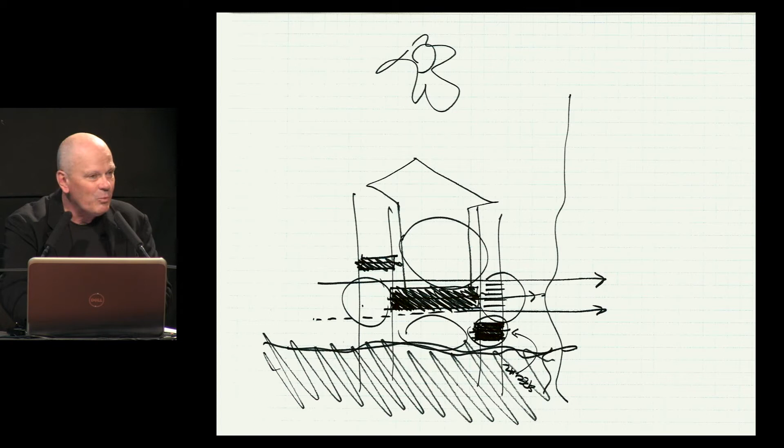Thinking about the places between, like in music, the places between the notes are as important as the notes themselves. That's why the great blues artists can make one-bar blues and be wonderful, right? Because of the management of the space between.

Simple question of making microclimates. Learning from the vernacular, here are the 3 little pigs making courtyards. So you extend the summer, the fall, and the spring.

We'd like to make architecture that is invisible. Someone asked me one time after a lecture in San Francisco, what would you like to do in the future that you're not doing now? I said, from a lifestyle point of view, nothing. But from an architecture point of view, I'd like to make buildings that are more invisible but have more to say.

Always modesty of learning from the elders. This is a building that fell down. We made another one across the street 15 years later as a tribute. Sometimes we come very close to those vernacular precedents.

The partie, of course, a French word, very important word to us. We beat it into the heads of our students. They don't like it. We tell our students that if you can't draw this 3D upside down across the table looking in the eyes of another person, you're never going to drive the bus. You're never going to be the author.

So this is the first sketch for a house that I'll show you now. All of these partie sketches start as a study of what exists already, and then they become progressively a proposition of what might be. So that house is that house, an extruded fish shack, which makes a big deal of the place between itself and the land. Seems like a boat.

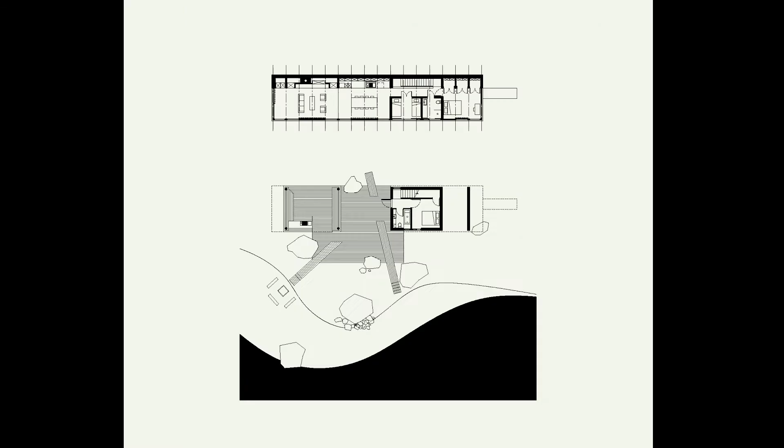So under is an important idea. This was under for Grandpa, who couldn't climb the stairs anymore, so he could watch his kids playing out of the sun. We do have sun in Canada. You come up into this temple, if you like.

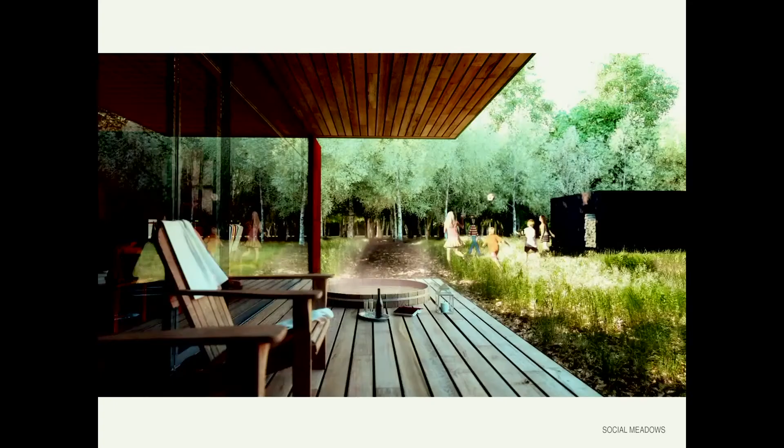Project in Ontario, making a community, an intentional community. And this is a place where the deer are the architects. So you notice, you learn that the deer make the grazing line at 2 meters, and this creates the architecture of the whole landscape. So our job was really just to reinforce the grazing line.

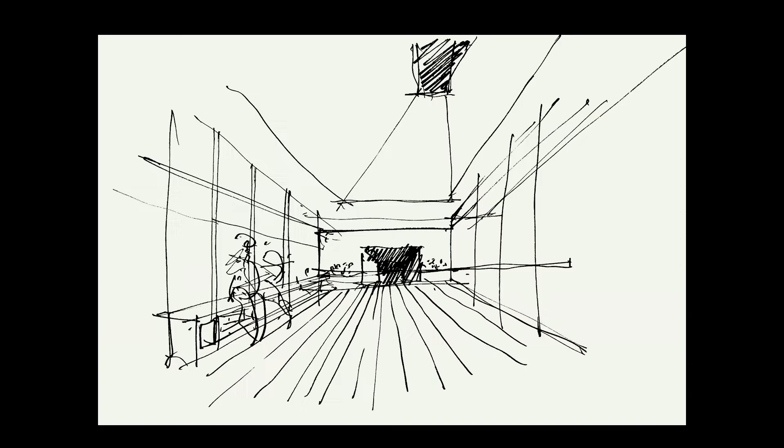One of Talbot's sketches, rendering. I don't use computer, but others do.

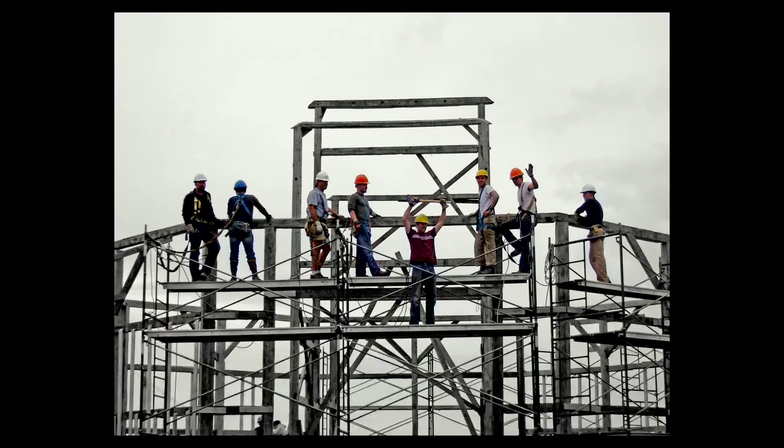Community gable building, the happy students, ghost students. We made this project in 1 week. It was a 19th century barn, moved, rebuilt in a week, and now it's a place for community events.

An author said to me the other day, what is the function of this building? I said, there is no function. So it will be very useful. Used for everything, road hockey, weddings, movie night.

So these buildings have found their way to our farm, like this early 19th century schoolhouse from my village, where I grew up. Again, this idea of minimum.

One idea that we reject is this idea of tradition versus modernity. Octavio Paz, the great Mexican poet, said, taken alone, tradition stagnates and modernity vaporizes. Taken together, modernity breathes life into tradition, and tradition responds by providing depth and gravity. So this is our idea about this false dichotomy.

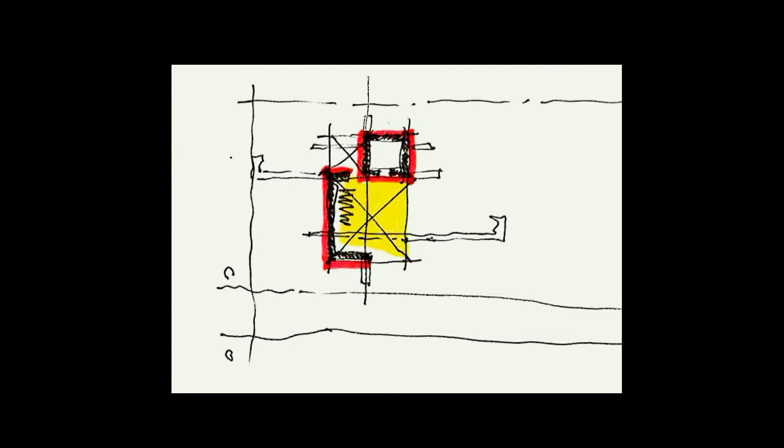So we put the 1830 building next to the building from last year, a Corten building called Enough House. So this is like this one, a kind of iconic, pure form on fins above the landscape. The partie, again, how much is enough? It's 65 meters square and sleeps 7.

Aggregated, when you take 2 buildings and make 2 courtyards, it's like 1 and 1 equals 3. It's the first sketch for that one, the partie of that, right?

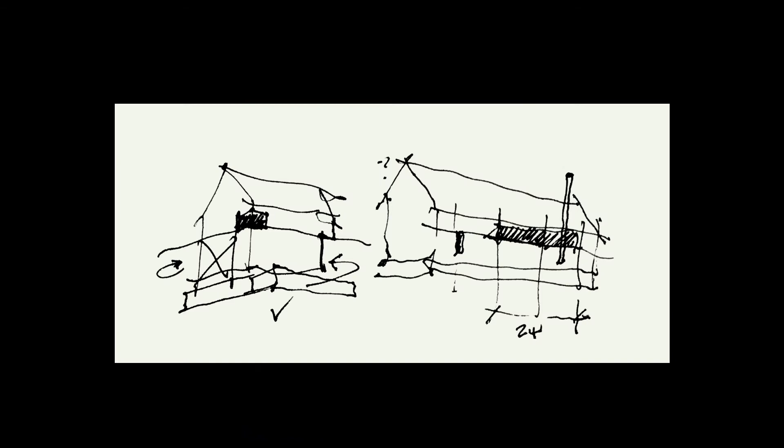My native friend wrote this essay about our work, called The Wind and the Moon. So this building is all about the wind and the moon. The moon, of course, it's called the tide house. Four times a day you see the tide coming around, wrapping around this house. It's lifted above the ground on fins so that if the tide comes in, the house doesn't wash away. The tide goes under the house.

So this is the wind truss, of course.

Aggregation, I wish I could say we did this. No, this is a vernacular building. Of course, that's why it's so beautiful in Norway.

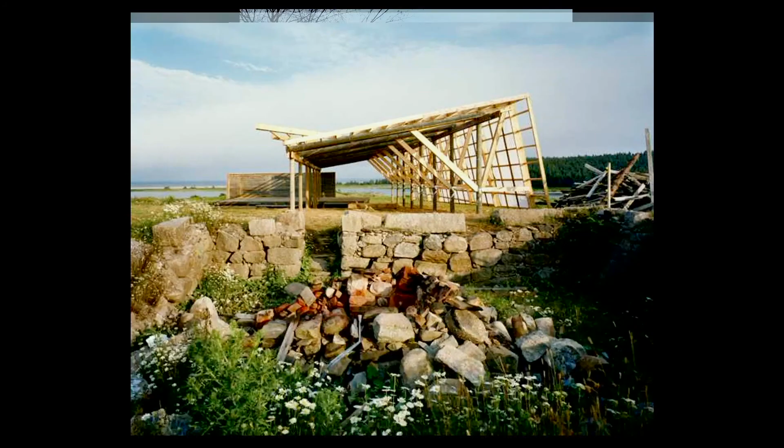But we're making a community now in Utah at 9,000 feet, 3,000 meters, based on making community, making courtyards. They have 20 meters of snow every year, so it has to be accessed from the top, like Santa Claus.

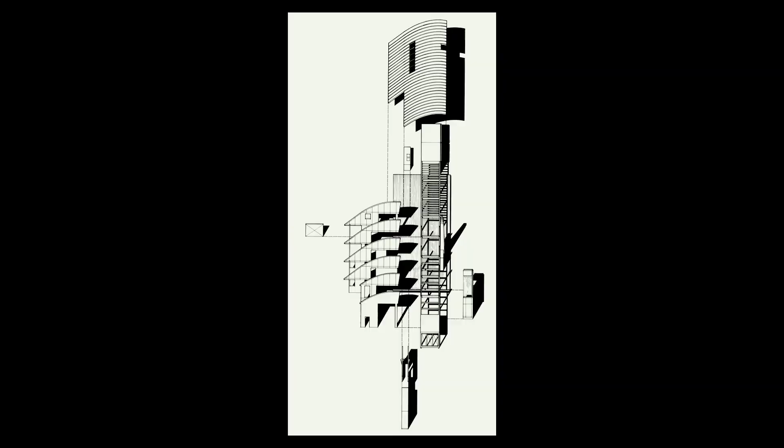Some lean-to houses, always about the landscape first. This house was built in 2 weeks for 100,000 Canadian dollars.

The party again. This is the clients and me the first day on the site together. It's about this idea, this primordial idea about prospect and refuge, the need for both prospect and refuge. Taught to me by a woman who was a client who was sexually abused as a child, so she knew all about that.

So this begets that. Pavilion on top of a rock, the ocean horizon, of course, passive solar, we shouldn't have to say it.

A community one like that, a library at University of Toronto, usually one material, and it usually has to be a material that can last for 400 years. So this is a copper library produced.

This is the sketch at the interview. This is the sketching together with the users to design the project. This is the point in the participatory design process when I was telling the users that they all had the same idea, and they believed me.

Social spaces. What comes with the public architecture is a kind of building systems approach, or approach to architecture that's about the trades, the building trades.

Now, Talbot, I'd like you to come up and talk about this next project, which is a real test for a critical regionalist approach. Thanks, Brian.

I guess to reiterate many of the themes that Brian was talking about, we were given a project to design a Canadian embassy in Bangladesh. And to us, that was kind of the ultimate test. We were doing a lot of work in our local region, so I guess the question was, how do we respond? What's our toolkit like when we go abroad? We couldn't imagine any place further from Nova Scotia, Canada, than Bangladesh.

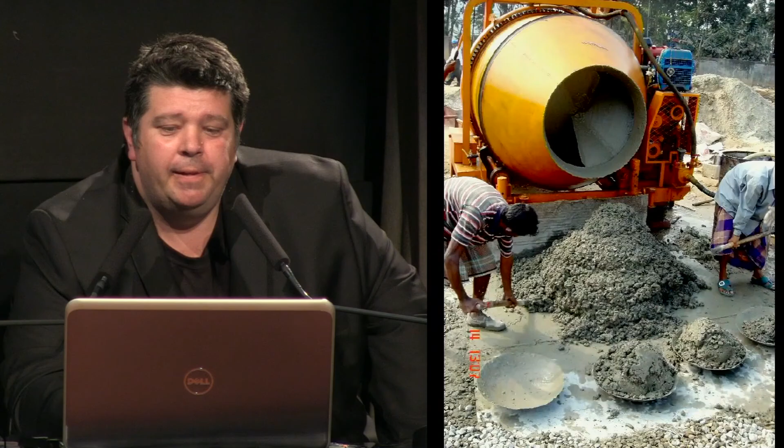How they use concrete: they pour it by hand with small tools and actually carry it on their head. It's an amazing thing to watch them pour a building. It's pretty orchestrated. So understanding the labor, the people, the construction was very important to us to start developing ways of thinking about a building that represents Canada in that culture of Bangladesh.

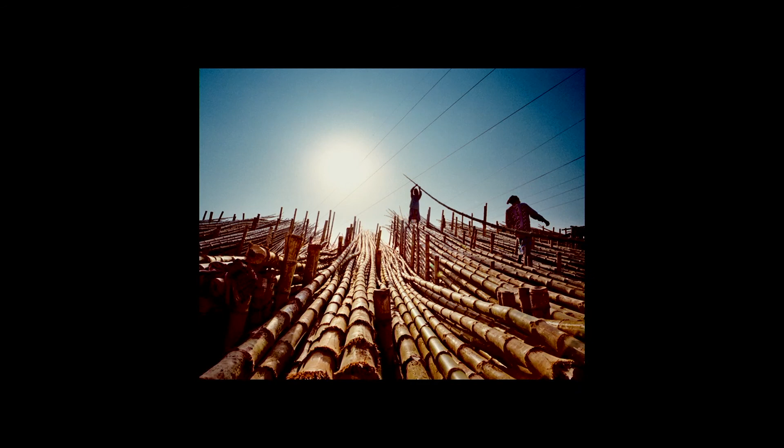Understanding that there's an industry of rebar. Rebar is needed, so they actually strip down tanker ships and remake their steel into rebar to make concrete buildings. Concrete is a great material they use there for seismic reasons. And here's bamboo, which they use a lot for construction materials and scaffolding.

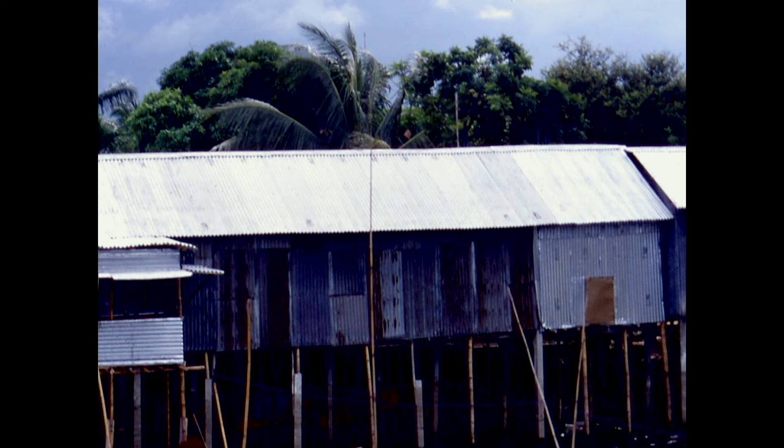Here's an example of their phasing approach in Bangladesh. They just build as much as they can afford, and let the rebar stick out, waiting for the next story or two or three. There's an elegance of form, dealing with the land, dealing with how buildings meet the land—again a response to the climate, the monsoon, the water.

Another thing is the typologies of buildings in Bangladesh around the issue of the courtyard. The courtyard was used for many reasons: for security, for refuge from a dense population, and also weather, again climate.

So this is our building. We ended up making a courtyard. We used brick, and we also used a bit of steel and a bit of glass, I must admit. We're neighbors to the American Embassy, which was actually a fort behind walls. We made our building into a courtyard wall building, which is more appropriate to the culture that is there.

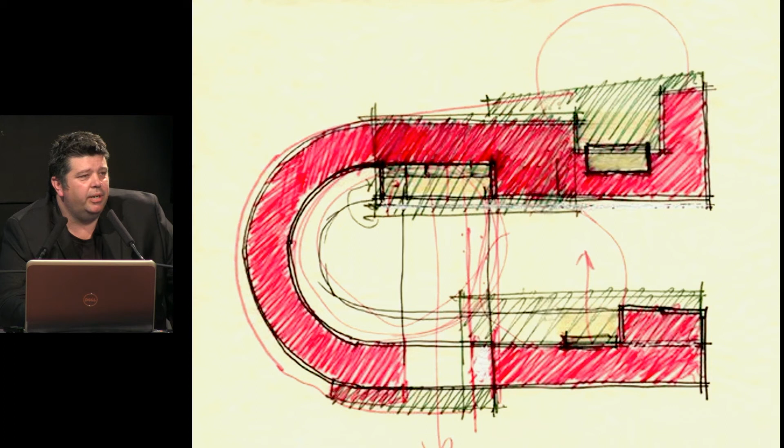Here's a first sketch, or an original sketch, the red being brick, and the green or yellow being the more social or public, so-called public places in an embassy. So we're starting to think about community, place, and environments. The green or yellow is actually the metal portions of the building that had to deal with the monsoons in an outdoor environment. First models.

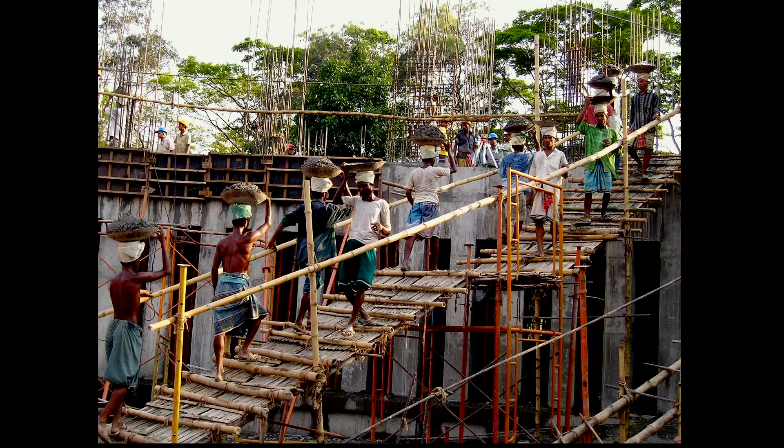Here's an example of how the concrete was poured. The Canadian government insisted on hard hats and steel-toe boots for workers. That didn't go over well—that's not how they build there.

Most of the things that result in this building come from dealing with the climate or the weather in harmony with how you use the building, of course. So the raised plinth is for when the floods come, you're actually up in the courtyard. The overhangs deal with the monsoon. The louvers on the south side deal with the sun.

This is a good photograph as an essay of all the things—you see the drainage, the grass, the sunshades, the protection from the monsoons as you walk into the embassy. So everything here is a result of dealing with the weather, the climate.

To end this case study in terms of the humanist approach: at this time, this was the only embassy in the diplomatic region of Dhaka, Bangladesh that actually provided cover for potential immigrants to the country. Very Canadian—we were proud of that. Dignified for the people that were there, waiting to see if they were interested in coming to our country.

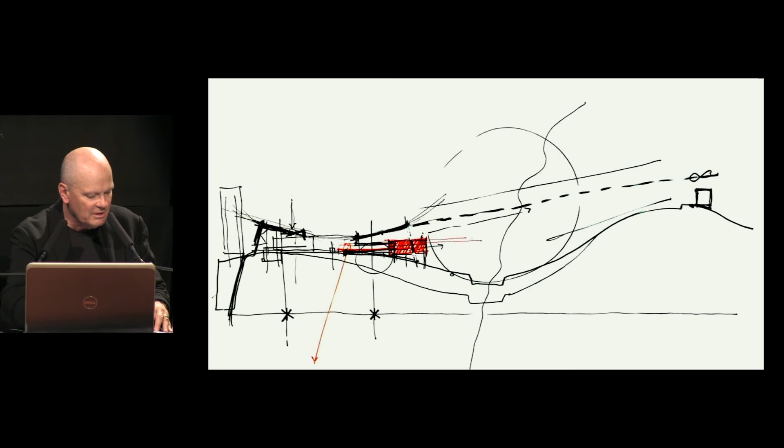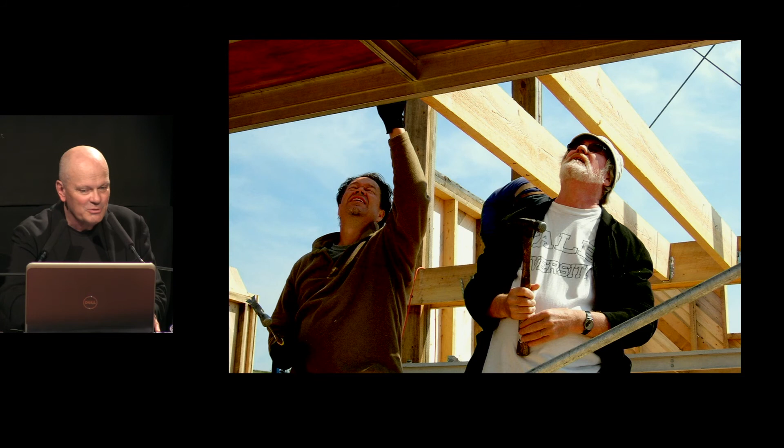This is a ghost project making 70 square meter dormitories, a kind of collaborative approach to building. The guests—you'll probably recognize Juhani Pallasmaa there with the hammer, Marlon Blackwell. We always had a place for guests to get together, like here. It's the liability shot.

The project was built in one week. Always inventing things inside—now this is a stair, so walking on air a little bit.

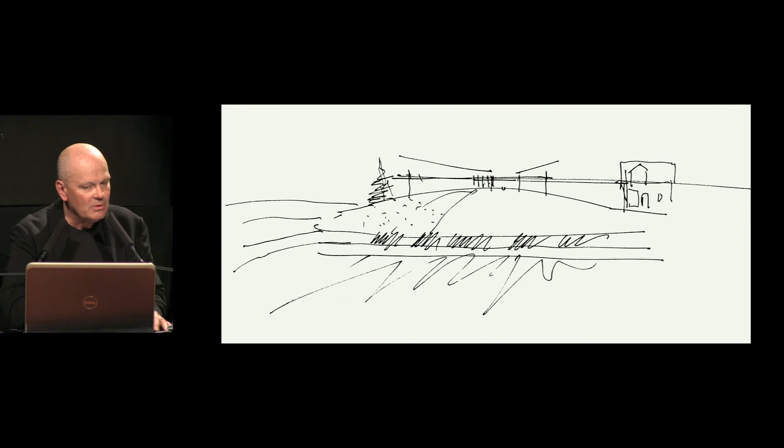More landscape-driven forms. First sketch with the client the first day, and then the project. Microclimate making, as demonstrated by Anna there. Passive solar.

A cousin, a more recent version of that project, where you see the ocean under the building—the view is withheld. So the choreography of how you get there is a big part of the architecture. You get seasick in this building because you don't see the land. It's an essay in seeing how much you can remove from the primary form without destroying it completely.

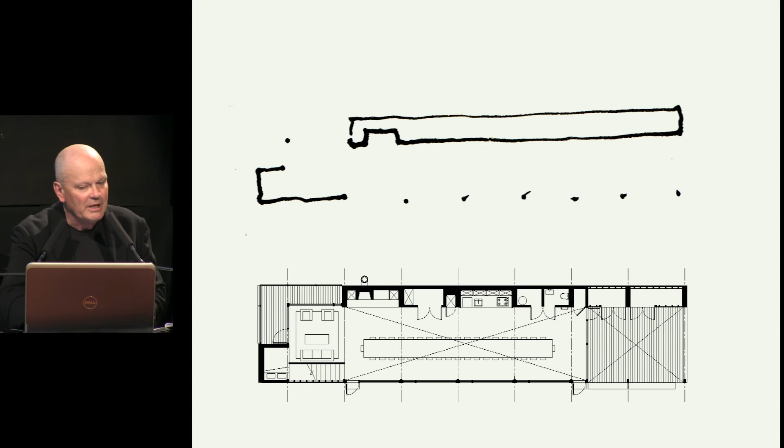Parti sketch for our studio, where we work in the countryside. The plan parti connected to the plan of the building. For us, the party is literally the project. You build the party, then you have a party, a community event. This is where we work in the country, always around a big, long communal table.

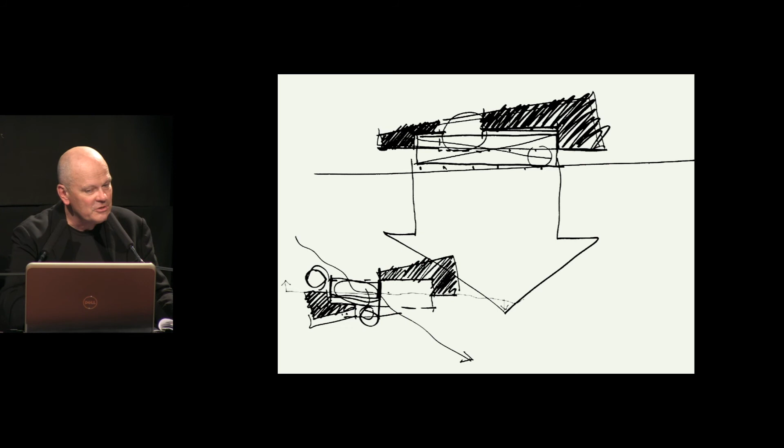Again, land and form drive the architecture. These are the hills left by the glaciers in the last ice age, so we build on these hills and learn from the geological time. It's a model that I think Talbot made. The parti, the plan parti, using Louis Kahn's served and servant approach, using the vernacular. This is the way cheap buildings are built in North America.

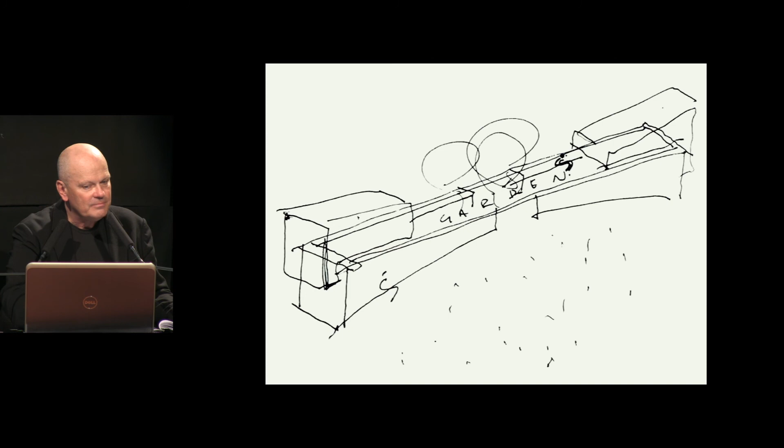I'm getting a sign now, I better rush. Another one on a hilltop, a courtyard house on a hilltop, the parti.

Cliff House, a sketch by Talbot. Two Hulls house, all about growing up in shipyards under ships being built. So these 40-foot cantilevers are because of the waves, which would take the foundation away.

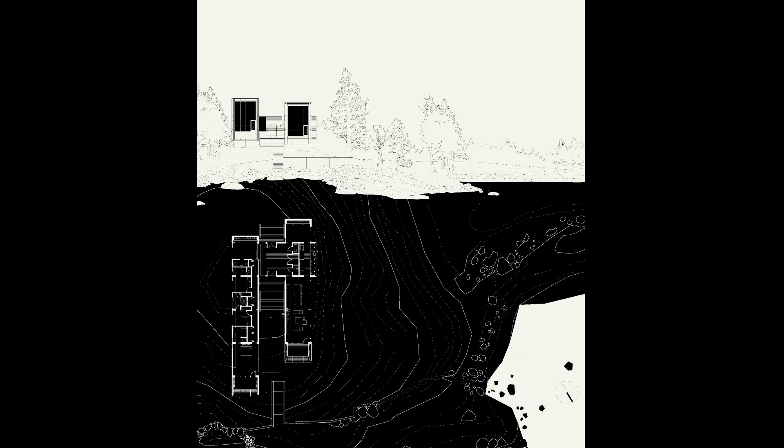I took Glenn Murcutt to this house. The first thing he said to me when he was in this room is, 'Where is south here, Brian?' I said, 'Back that way.' He walked out. He wouldn't speak to me.

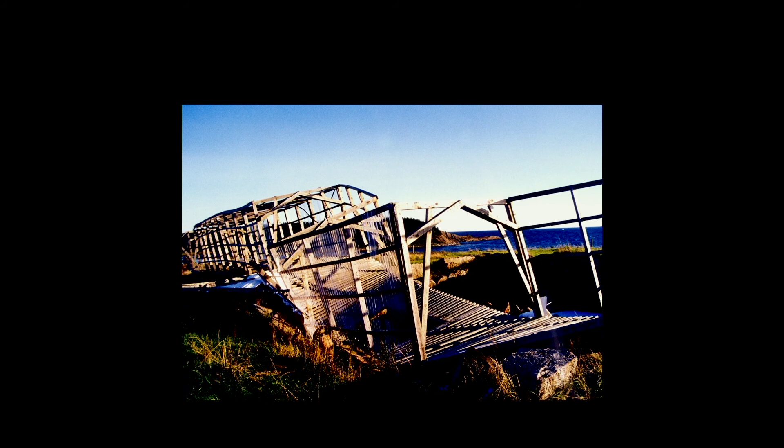Under, again, between the building and the land, framing the landscape. The Godzilla shot. Another ghost project with the students on the ruins, all made out of 2x4s. A wind tube to express what the wind does to it. Another ghost project, parti sketch. Ted Flato was a laureate here earlier, worked on this one with us. The 1:50 model, the 1:1 model.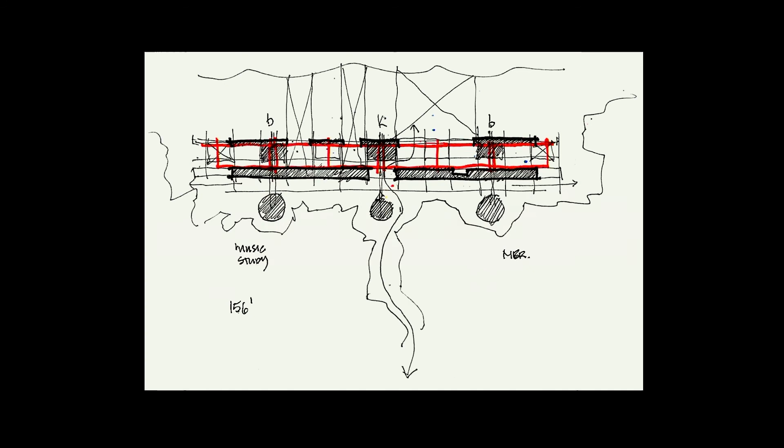Our boathouse, all about the landscape. Cliff House, which is monumentally modest, according to a critic. Very, very cheap building, which is all about making the most of the topography. A house in a stone part of Ontario, a long wall on the cliff over the sea.

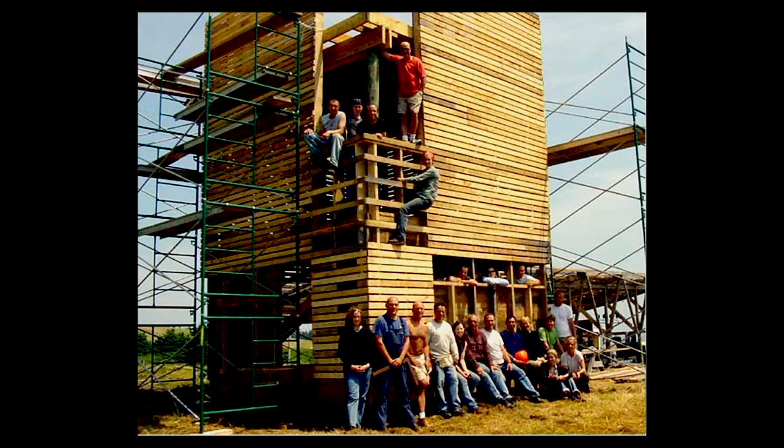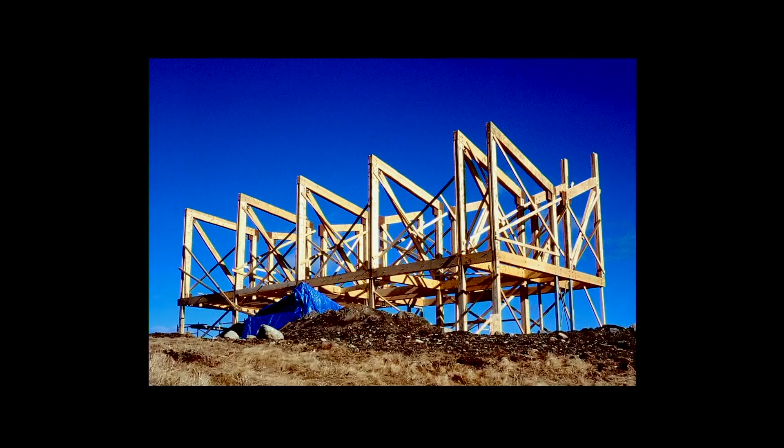Ghost project, parti sketch, the community party, and of course the idea that architecture is a team sport. Another house that's all about the place between, made between the pieces, floating above hilltops, 500 feet apart. A third piece, which is like a block of butter.

A little live-work house for 165,000 Canadian dollars called the Box House. A sketch on the left in the kitchen with the lady, and then the building. Photographs by her son. Extremely economical, right? Another box house.

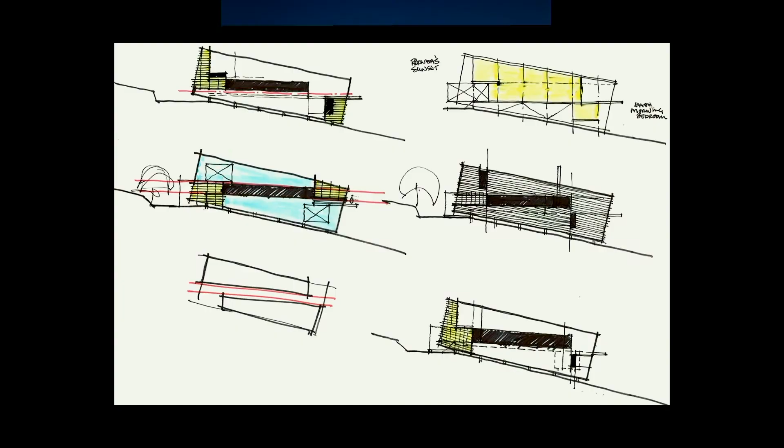Our office in the city. Another 40-foot table. Making a repair of the urban fabric. Another act of will, I guess. Public architecture in the vernacular of office buildings, so very cheap.

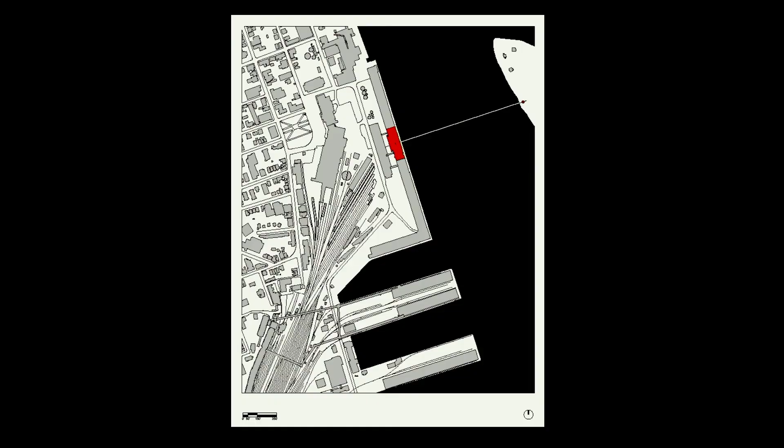An art school. When we make a building on a campus, we have to make two quadrangles when we add one building. Sketch by Talbot of another university building in Ontario. So light as a form generator for the building.

Social agency, always. There was no program for this kind of social space. Then we're making urban projects in Halifax now. This is a project in progress. The red lines, of course, are the people. The bar is a stone bar. The yellow ones, the chocks that hold it up, are Corten steel.

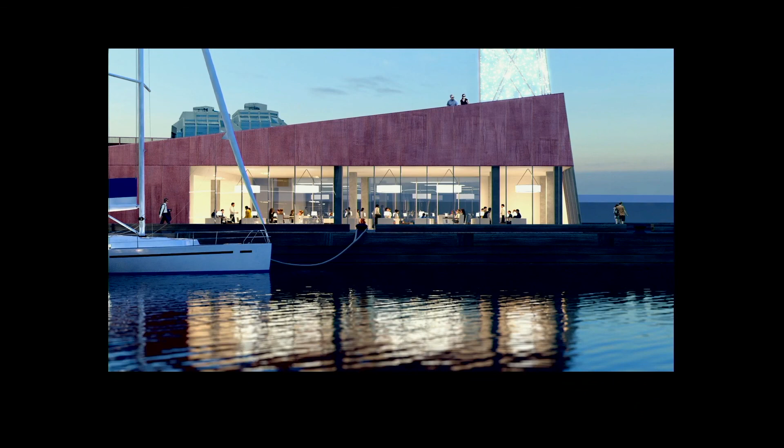Parti again. So this is going to be the end.

So we're interested in architecture that's about cultivation rather than about consumption. There's a picture of two elders, Albert in my neighborhood, putting seaweed in the land to leave the world a richer place. Charles Moore, our teacher, our children, a different kind of elder, one with a PhD.

I'd like to think in terms of practice of us as farmers, cultivating. I'd like to think of ourselves as teachers, like the village priest. Keeping the lamp lit becomes especially important in the face of often disappointing reality. So it's a combination of both listening and willing. And there's a kind of utopian dimension to what we do, which drives us.

In one way that becomes clear is that we don't make a distinction between family, community, teaching, and practice. It's all one project. As Alvar Aalto said, all of architecture is a search for paradise on earth. Thank you.